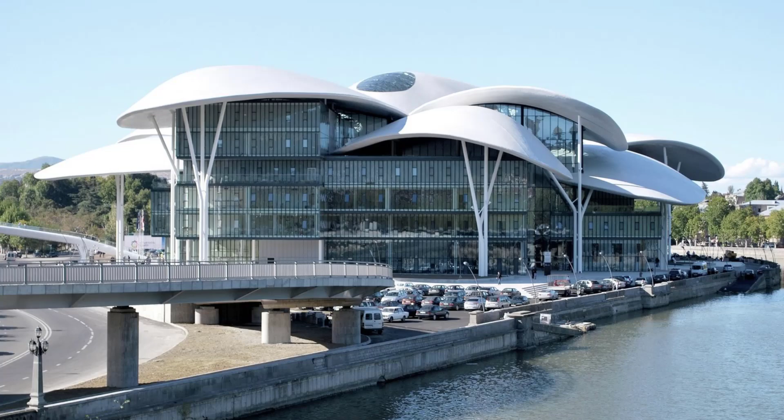Hey everyone, in this tutorial I will show you how to model this building, which is Tbilisi Public Service Hall by Studio Fuksas. So the trick in this building is actually all about the roof. The remaining of the building is just some rectangles and normal extrude. So anyway, let's start.

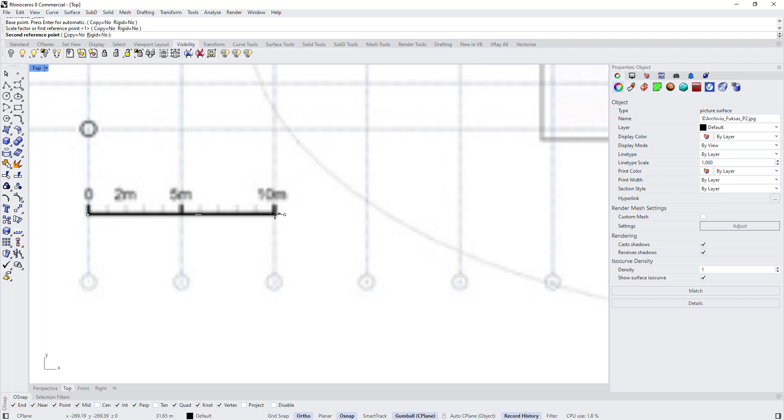So I already modeled these rectangles before recording to save some time, but I will show you how I did anyway. You can double click to minimize the perspective and double click to maximize the top view. You can drag and drop the floor plans, choose picture and scale it. You will find a scale bar here. So you choose scale 2D or 3D. I choose 3D. And this distance is 10 meters, so type 10.

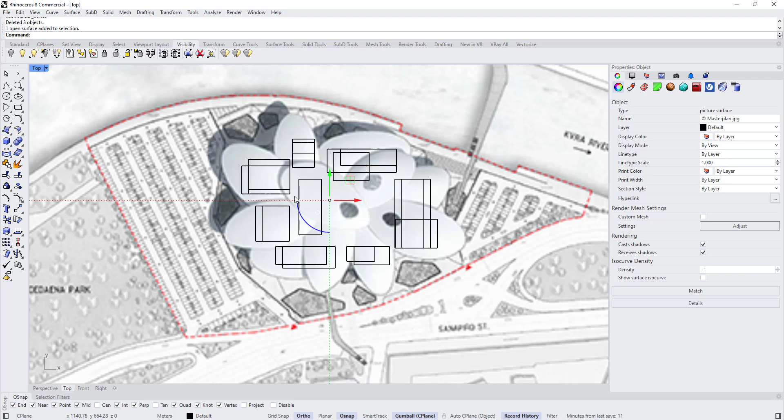And then start drawing the rectangles and then extruding. I did all of this before recording, because all the trick is about this roof. For the roof I also imported this image and scaled it, but I realized that this scale bar wasn't actually right, so I scaled it using this image as a reference. As you can see here, we have these exterior lines of the roof, so I use it as a reference to scale the layout.

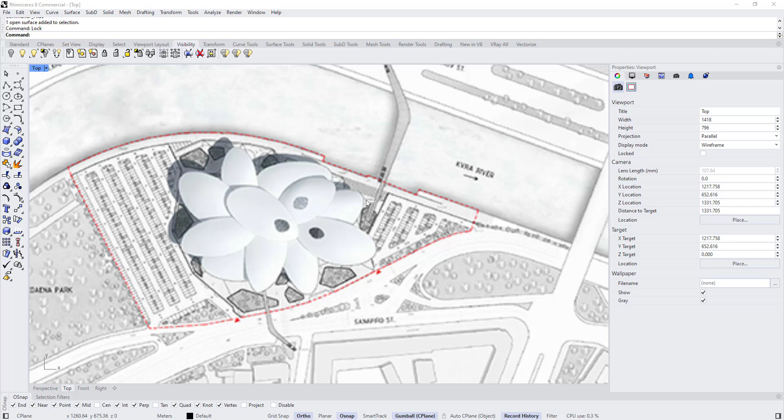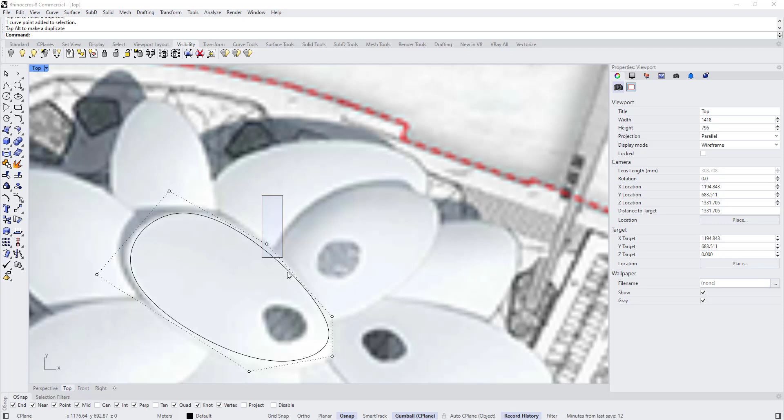Anyway, after importing the image as a reference, for now I will select all these rectangles and hide them, so press Ctrl H. Select the image and type lock, or you can lock it from here so we don't move it by mistake. And we'll start drawing curves, press F8 to close the ortho, by following these shapes, and start adjusting the control points using the gumball to match the reference.

I can copy this, select it and hold Alt and move it using the gumball. Then start adjusting the control points again. Let's disable the always record history for now. So right click here and uncheck always record history.

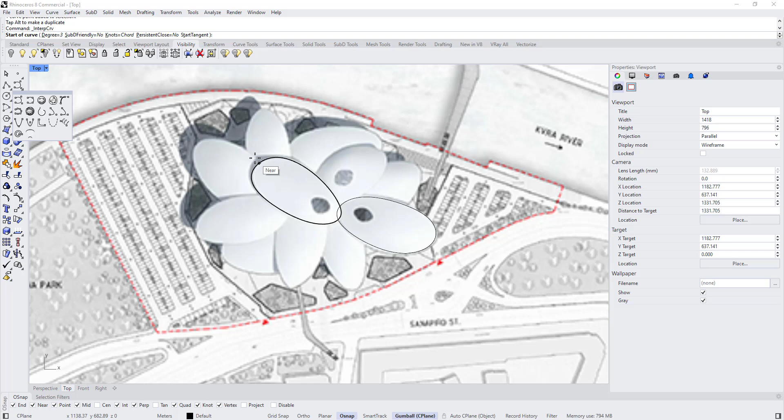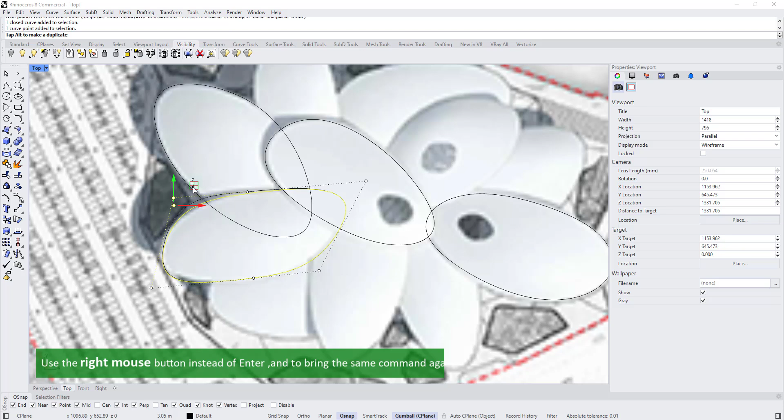We can choose this curve better. We can choose interpolate points curve so that the points will be on the shape, and then start adjusting it again. Right click to bring the command again and draw the remaining curves, and so on. I will speed this part a little bit to save some time.

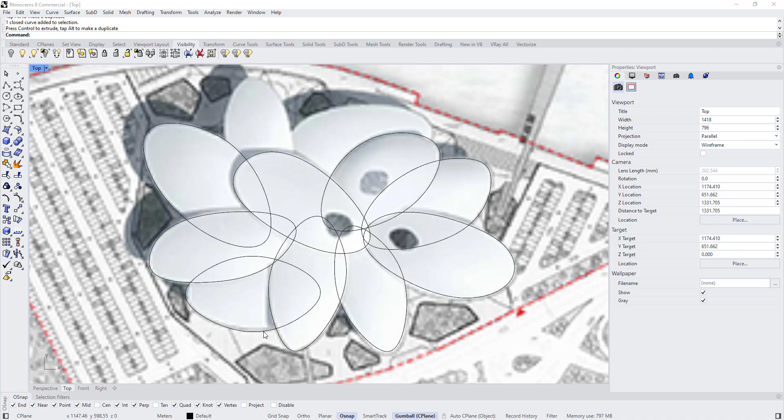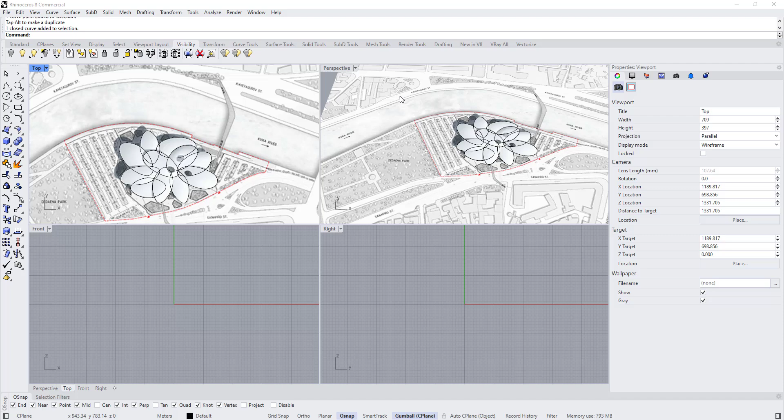Okay, now after drawing all the curves, I want to show you what we are going to do to create the surface. Double click to minimize the top view and double click to go to the perspective. What we want to do is to create a surface. So we can go here and create planar surface, and then we can rebuild this surface and move it up. Then press F10 and start moving the control points.

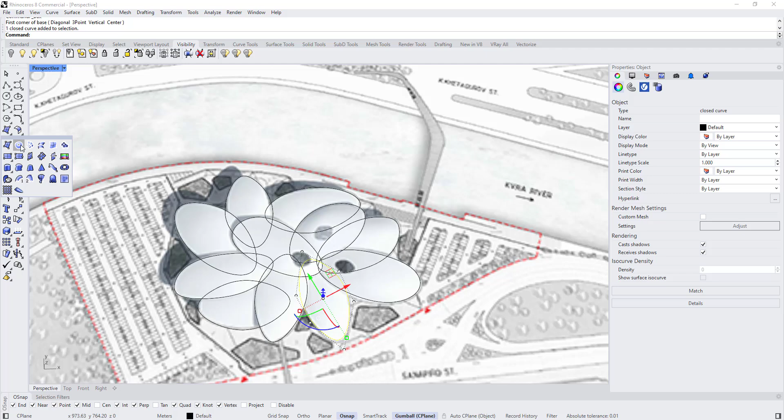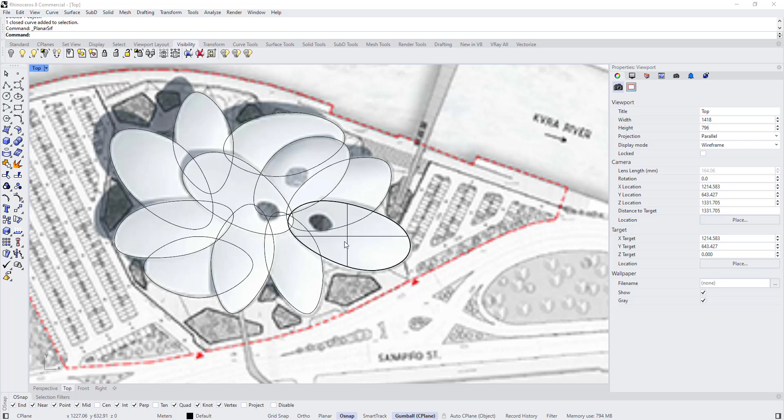For this shape, we didn't face a big problem, but for others we do. For something like this, if I created a surface from planar curves and press F10, as you can see, the control points are following the XY plane, not the shape itself. The points are not aligned with the shape.

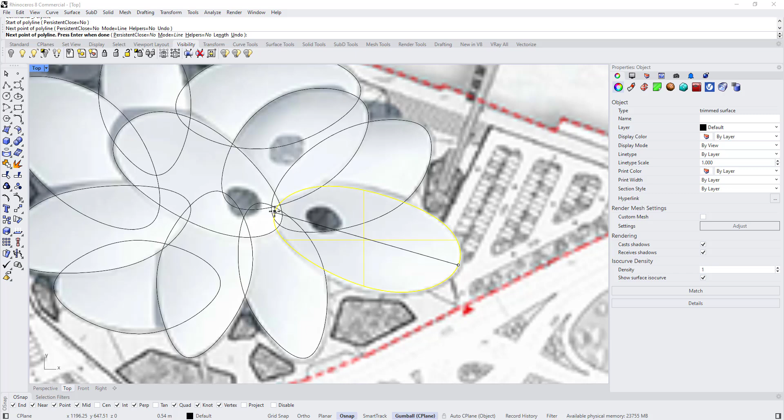What I want to do is to rebuild this surface or create another surface in which the UV directions are aligned with the shape, something like this, following this line, and something perpendicular on it like this. So the point is, don't use surface from planar curves.

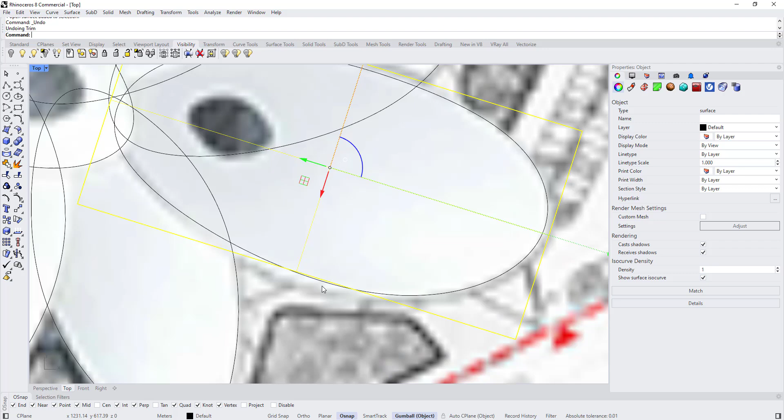What we are going to do is to create a 3-point surface, and draw the surface manually, trying to create the smallest bounding box for the shape. Choose the gumball, make it align to object, and start scaling it a little bit, moving it like this. And then trim it. I had to move it a little bit like this, and then trim the surface.

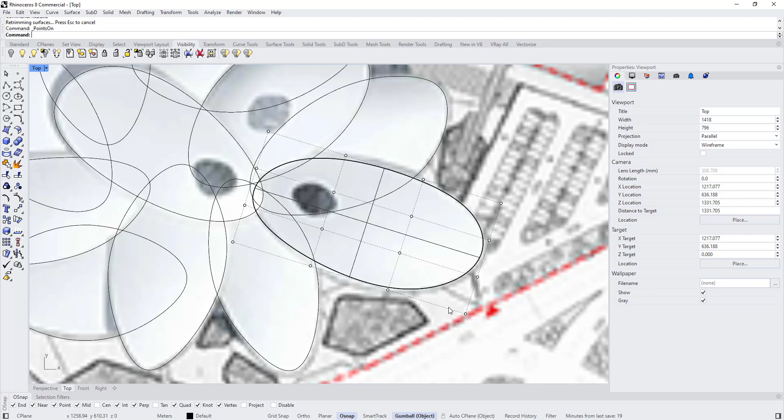This will give us a surface aligned in a better direction to be able to work with. So after we rebuild it, we will be able to edit it easier. As you can see, the exterior control points are closer to the curve. So I will keep creating the surface for the remaining objects. So choose 3-point surface.

Draw one here. Start aligning it. Double click, move this handle. Start scaling a little bit. Scale it from here too. Then hold Alt and copy it and rotate.

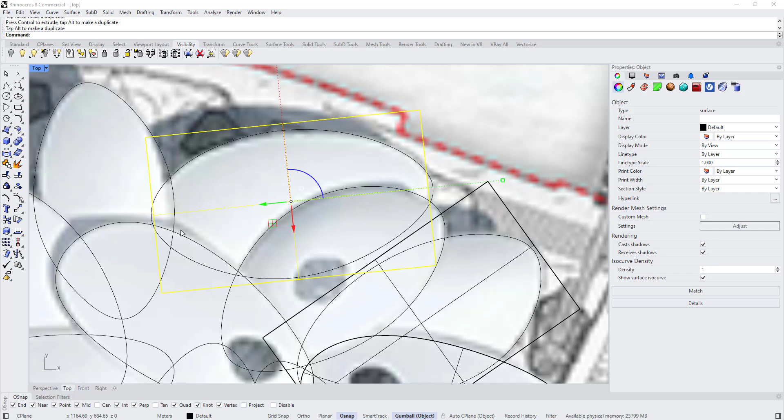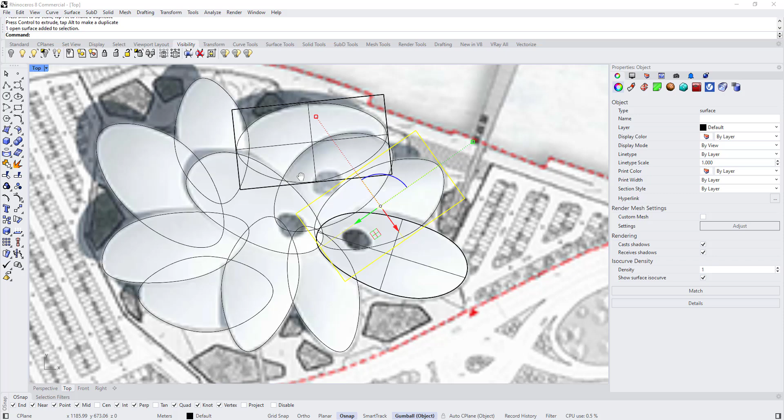So we'll keep creating the remaining rectangles for all the remaining shapes. Hold Alt and make sure that the gumball is set to align to object, to be always aligned with the rectangle. Double click and go to view, and let's align this one. I will speed this part up a little bit to save some time.

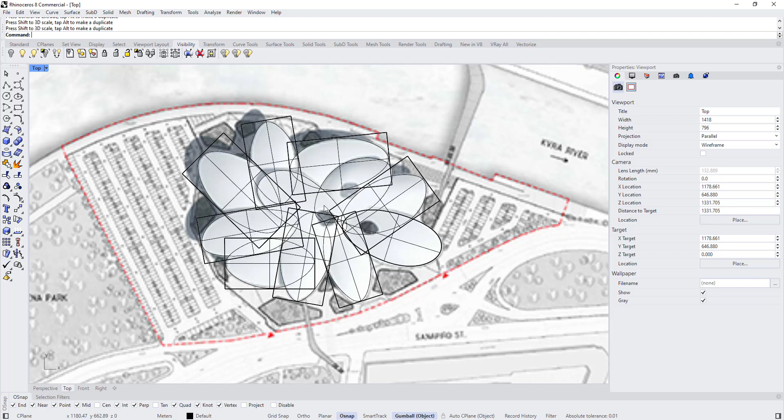Okay, after drawing all the surfaces, we are going now to trim them. So type trim, select the curve, right click, and select the object to cut. So right click to bring the command again, select the cutting object, right click, select the object to cut, and so on. Select the curve, right click, select the object to cut, right click to bring the command again, select the cutting object, and so on.

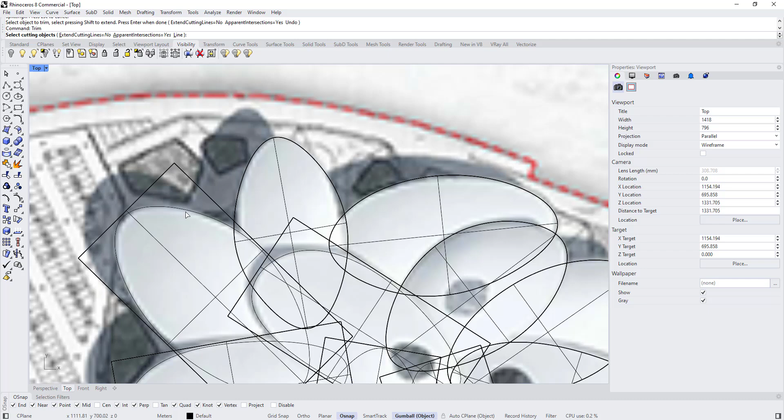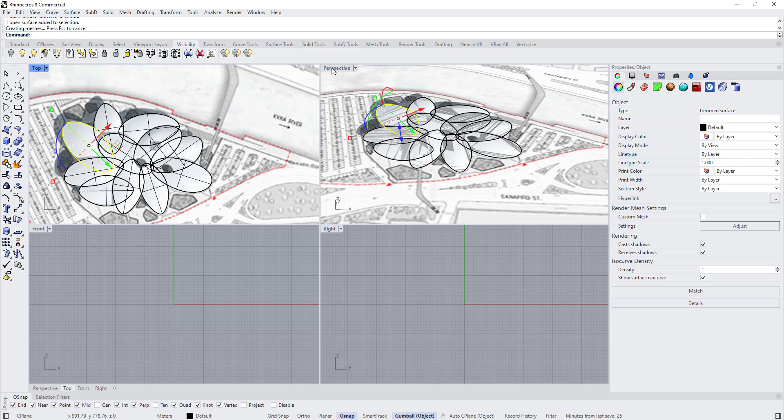So now we trimmed all of them, so double click to minimize the top view, double click to maximize the perspective, and select all of them. Move all of them maybe 50 meters. I will hide these curves for now, so select all of them and press Ctrl H. So I will use this as a reference to move objects in their right order. For example, this is in the top, then this under it, and this and so on.

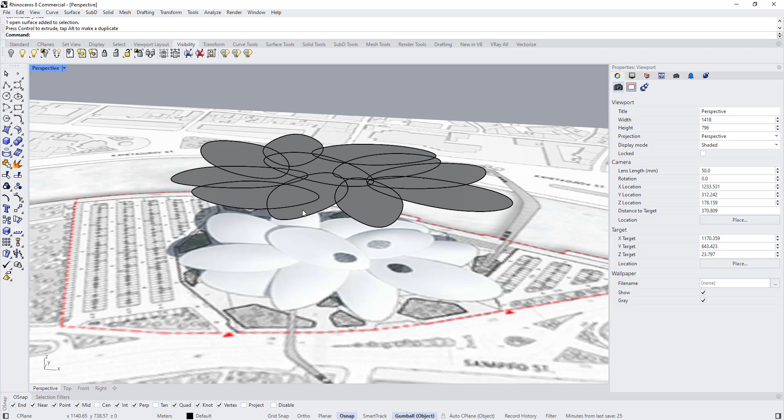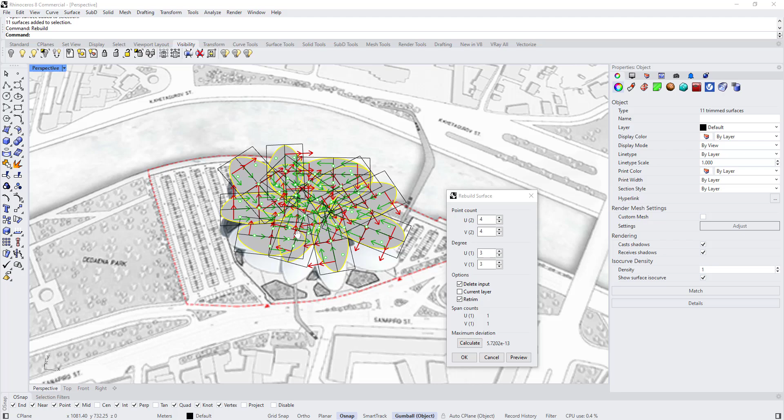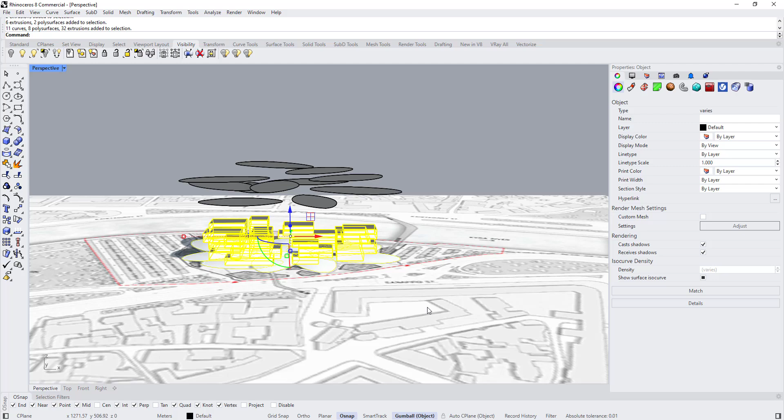So this needs to go up, and then this one needs to go up a little bit. Then this one, then this, and this one needs to move up, and this up also. This. Move up also. And I select all of them and rebuild all of them. Let's set the U division to 4 and the V to 4 and the degree to 3 in both directions. Press OK. Let's open the visibility to show these floors and select all of them, and let's lock them for now.

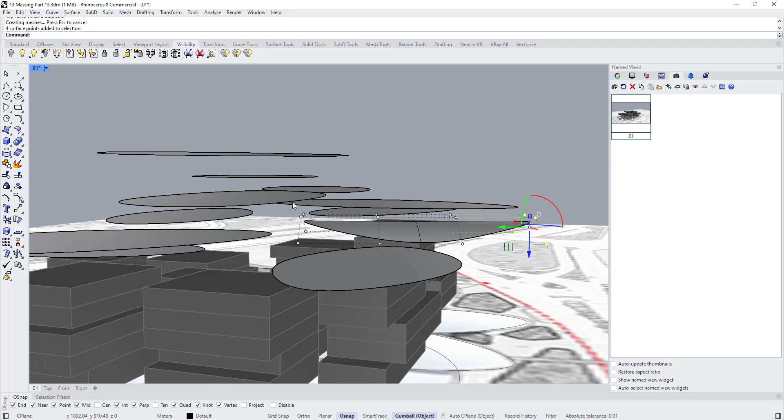Now we'll start using this image as a reference and start adjusting the design. Let's select all of this and move it down a little bit, maybe something like this. Okay, select the surface, press F10 and start moving the control points. So select all these control points, move them up a little bit, and then select this one and hold shift, select these parts too and move them down a little bit, maybe something like this, down more, and press escape and then move the whole surface down a little bit.

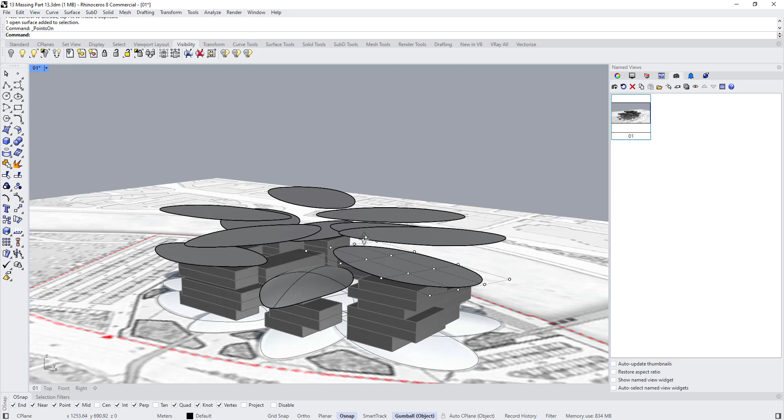And then for this one, same thing, come here, select all this surface, move them up, let's select all these curves, move them up a little bit, then select these points, and then move them down. And this one, let's click on the circle and align the Gumball to the CPlane. I think this needs to go down a little bit, maybe this part too.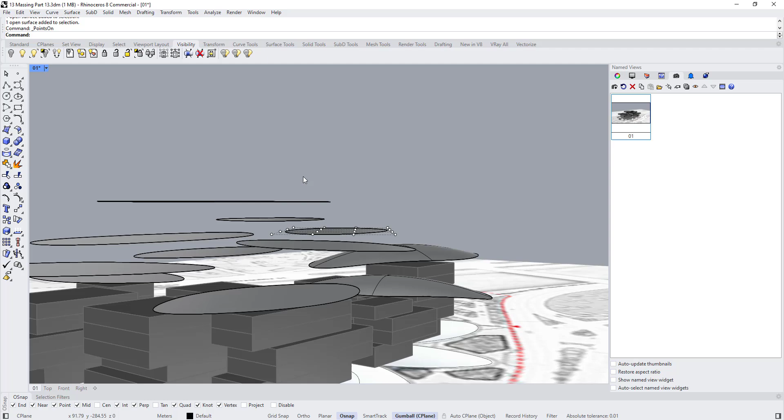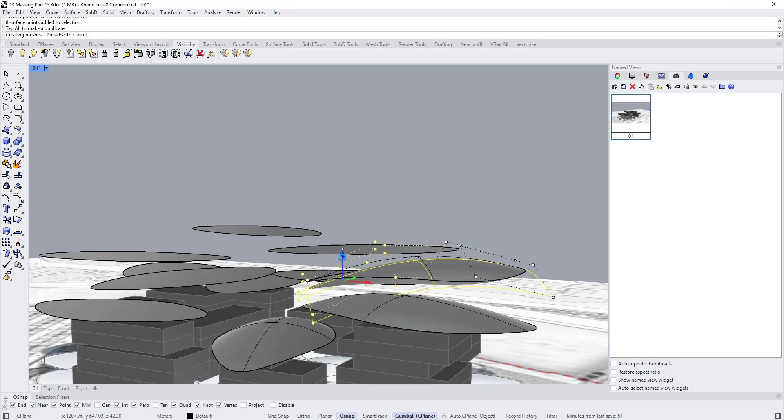Press escape, select this one, press F10, select these two rows of points, move them up. So let's go here, select this down a little bit, select this down also, maybe move it up a little bit. This one needs to go down, and so on. So we'll keep adjusting the control points until it matches the requirements. So I will speed this part up a little bit.

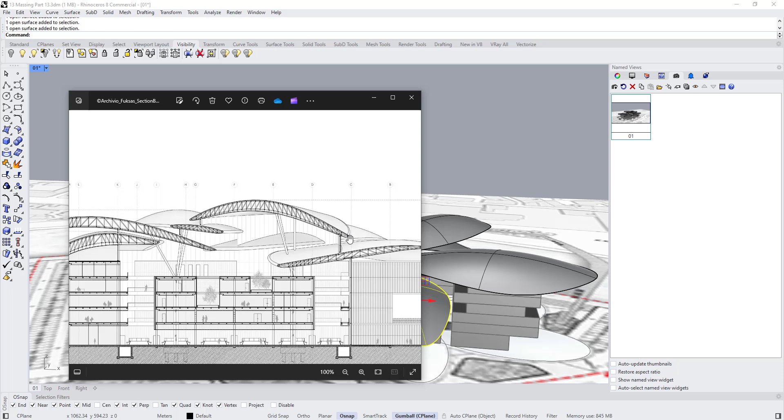Okay, now after adjusting all the control points for all the roofs, we want to add thickness to these surfaces. But first we need to understand how it's going to look. So for example here, if we look at the section, the thickness is not uniform, so we can't just use offset surface. So we will use offset surface, then we are going to adjust the control points of the surface underneath. Then we are going to use blend surface to create this soft connection.

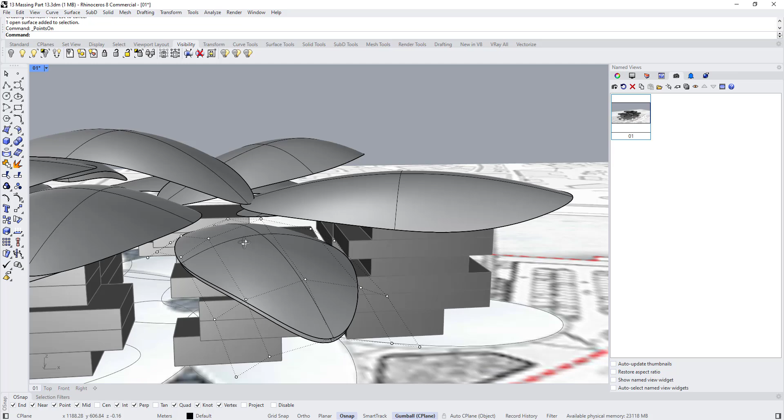So let's start with something like this. Let's type offset surface. Let's set the value to 1, for example, and press F10. Okay, Control Z. So I want to show you something. For this one, if I press F10, as you can see, the control points here are 1, 2, 3, 4. Here for this one, after creating the offset, the control points are 1, 2, 3, 4, 5.

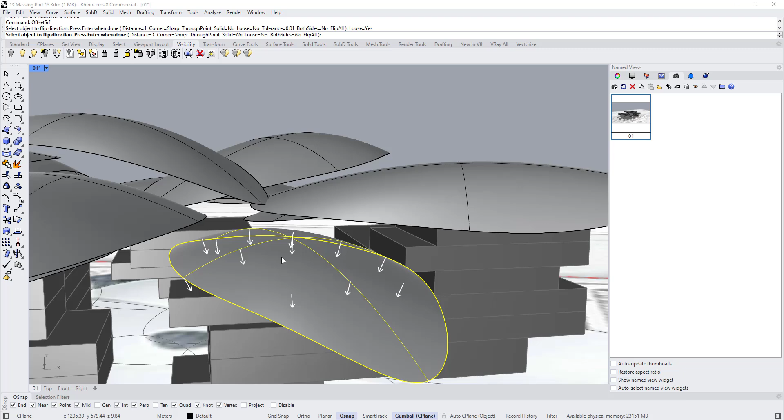The control points increased. If you want to create an offset with the same number of control points, I will delete this for now, we can use offset surface, but in the settings, set loose to yes. This will make the offset distance maybe not 100% accurate, but it will give us a surface with the same amount of control points as the original one. And by the end of the day, we are going to readjust the control points, so it's fine if the distance is not 100% accurate. So set loose to yes and create an offset.

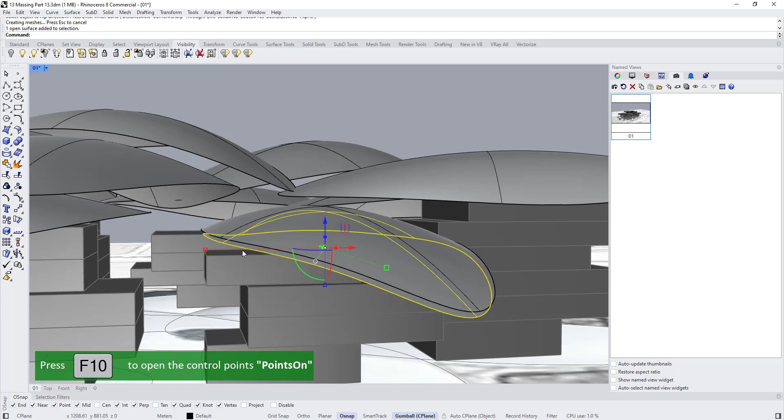Control Z. Okay, I will set the offset distance to 0.8 maybe. Press F10 to open the control points. Now, as you can see, we have the same control points. I'm going to set history to yes and type blend surface. So create a blend between this edge and this edge. And now I will select only these 4 points and move them down a little bit, maybe something like this, to have more thickness here.

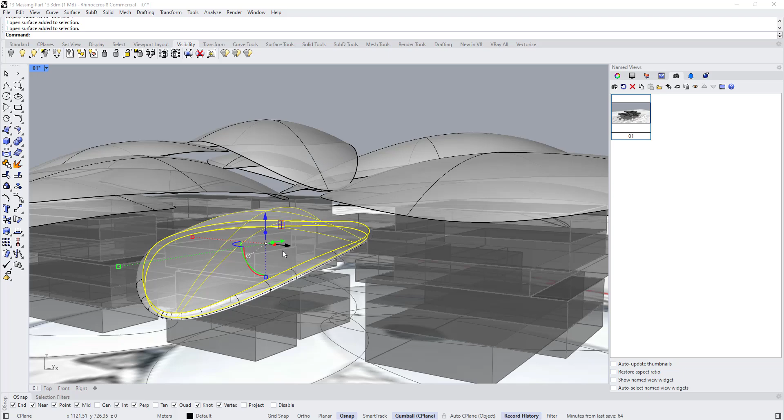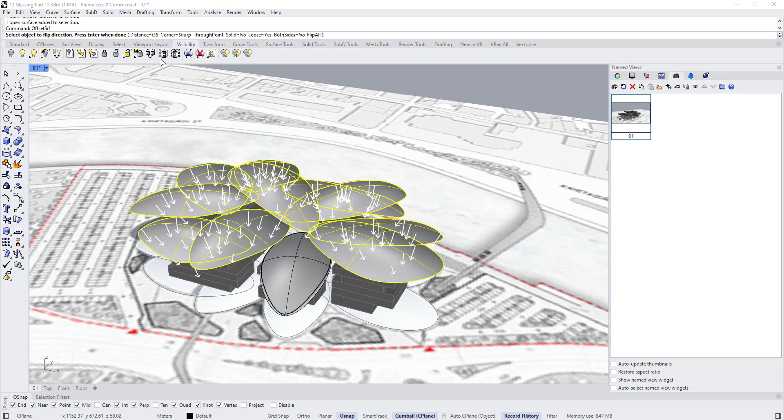So if I switch it to ghosted mode, maybe select this one and this one, as you can see, the distance between these curves increased, and this is something similar to this section. So I'm going to repeat this process for all the remaining surfaces. So I'm going to select all the surfaces at once, hold shift to select multiple objects at the same time, type offset surface and set loose to yes and the distance 0.8, and make sure all of them are in the same direction. So press right click.

So now let's blend surface, select this edge, and then right click, this edge, right click, and just set it to curvature or maybe tangency. Okay, no, set it to curvature. Curvature is fine. Right click, and again right click here. I am using the right mouse button to bring the command again, and instead of enter to finish the command. This is for a faster workflow.

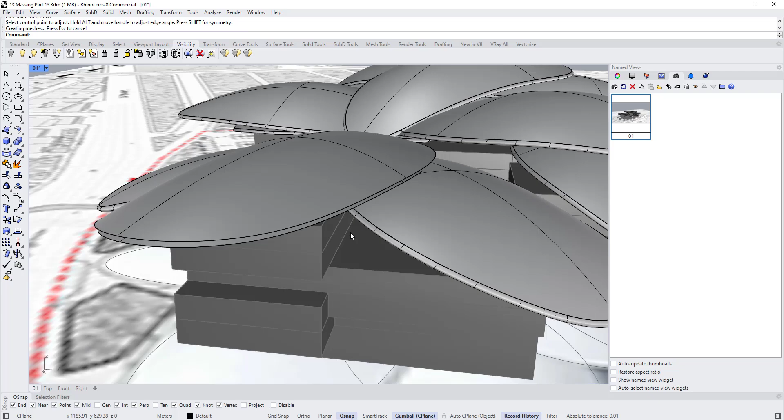Maybe this one needs to go up a little bit, so I'm going to move only this one. Since we were recording history, when I move this up, all the other elements also moved up. This one needs to go up a little bit too.

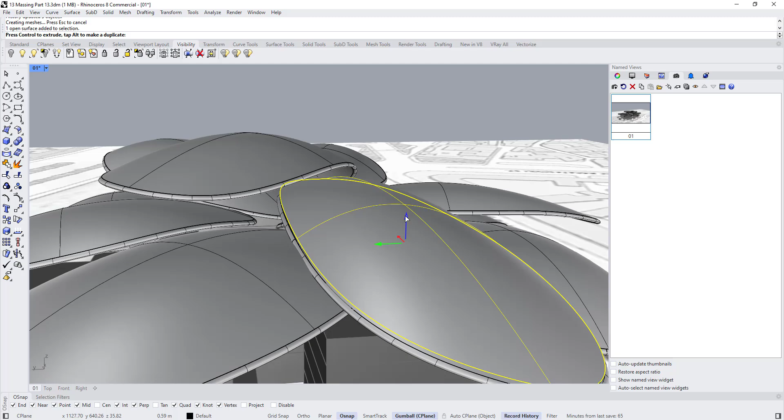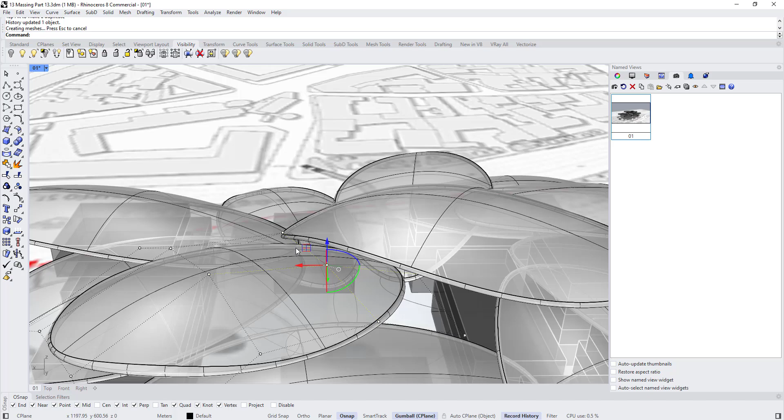Select this one, press F10. Okay, Control Z. Select the one in, make sure to select the one in the base.

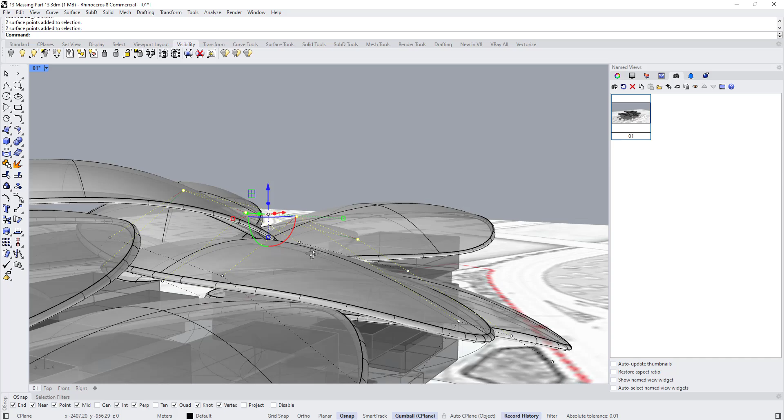Okay, that's it, we are almost done. Only remains creating the columns. So let's go to the... Okay, for the columns, I will need to... let's unlock this for now. Let's select this image and press Ctrl H to hide it.

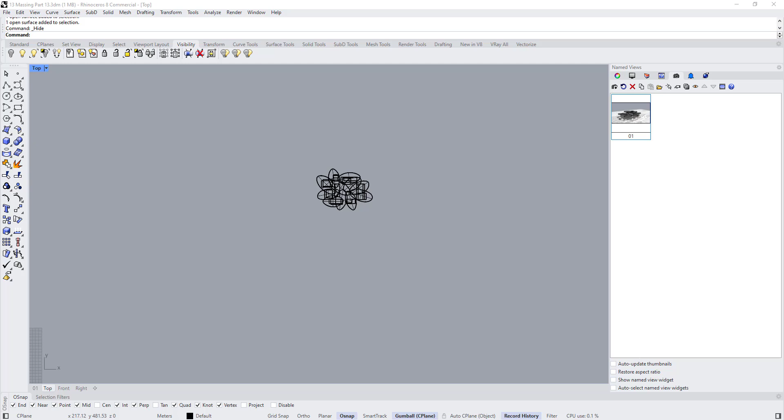I will need to use one of the floor plans to create the column, so I am going to import this one picture and scale it. Let's use this scale tool - choose scale 3D, select this point, press F8, open also a second point and type 10 meters. Let's place it in position.

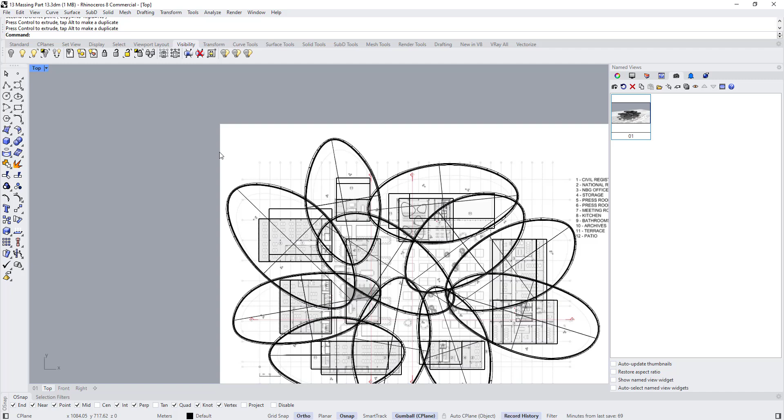And let's lock it. As you can see, these 3 points are for these 3 circles are for columns. So I type point and press a point here, right click to bring the command again, press a point here, and right click to bring the command again and press a point here. Now to create a curve from a point, we can extrude it.

So I'm going to use a gumball and extrude it like this. So we have these 3 curves. And as you can see, the columns are not completely straight, they are inclined a little bit here.

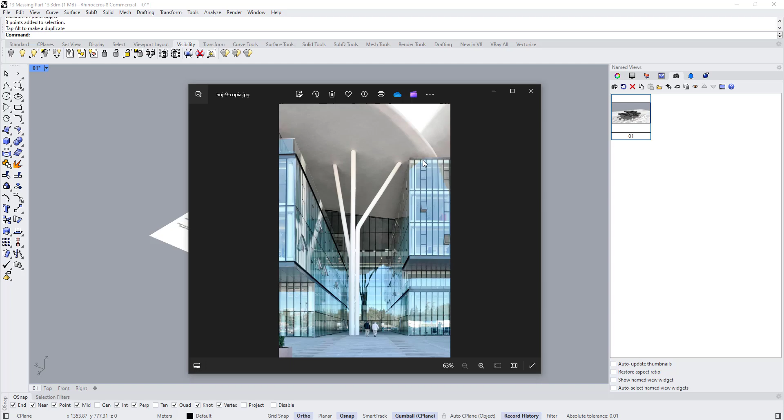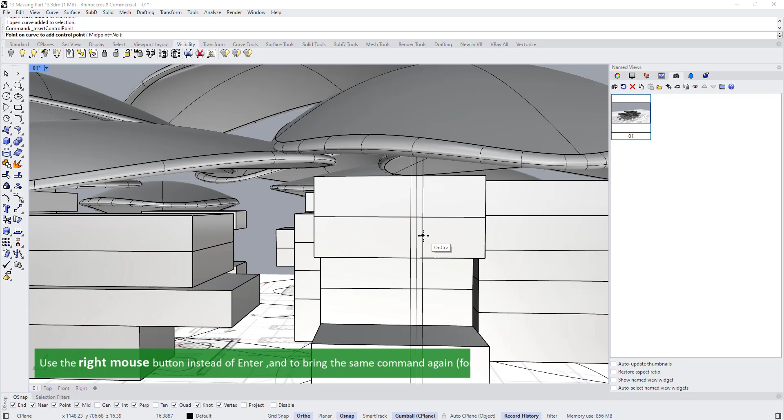So select all these curves and let's isolate it. Select it, press F10. So this one needs to go maybe something like this, and this one too needs to go something like this, and move everything up until it intersects the surface.

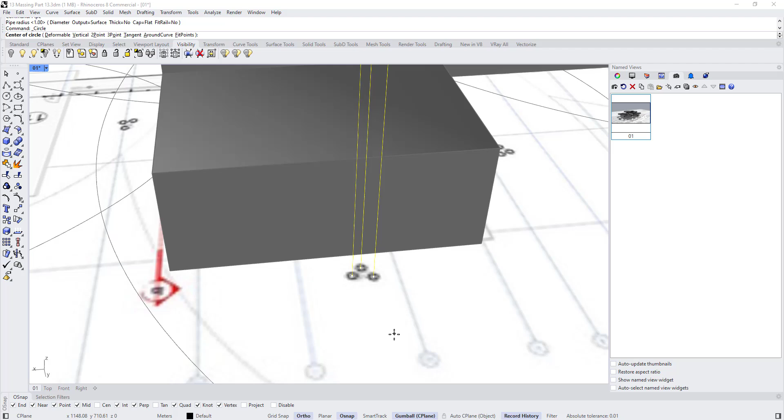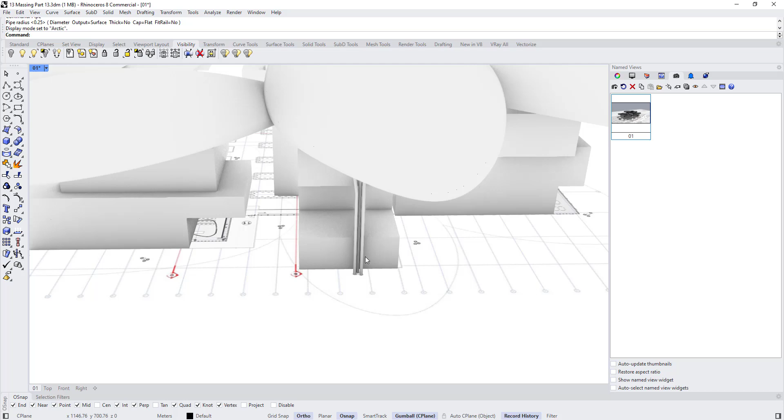And by the end of the day, we are going to use pipe. I just need to see this - the radius is about 0.25, so select these curves and type pipe, radius 0.3, press enter. Okay, now radius 0.25. And I will use the same process to create the remaining columns.

Okay, let's go to the top view. We double click to minimize the view and double click to maximize the top view. Type 'points' instead of 'point' to be able to create more than one point using the same command. So press point here, let's close the ortho. One here, and here, here.

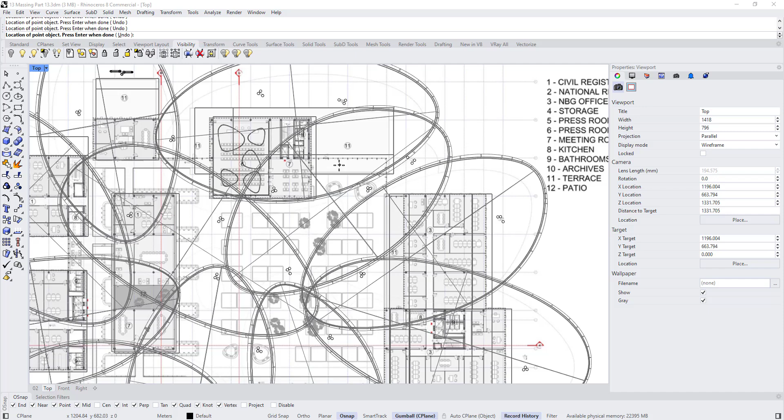Okay, after finishing placing all the points, press right click, double click to minimize the view, double click to maximize, type SEL curve, or you can use it from here. Select... SEL points, select point, or you can use it from here.

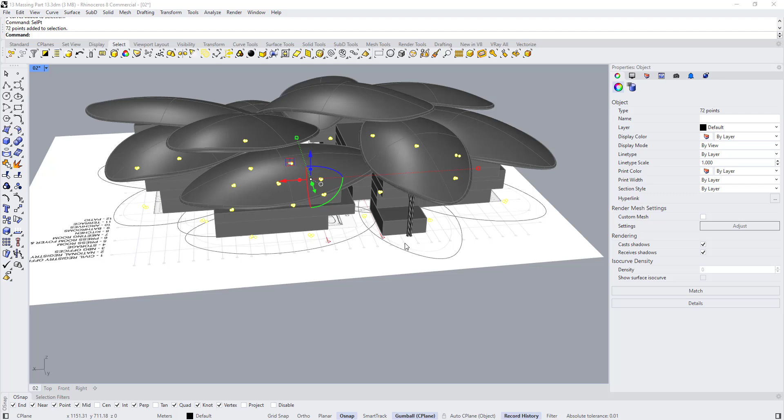And now let's extrude all these points, and let's start adjusting them and adding, for example, this point. Select this, press F10, and maybe I can select all of them and type pipe.

We are already recording history, so after creating the pipes, if we did any adjustment to the curves, it's going to be reflected in the pipe. So set the radius 0.25, right click, okay.

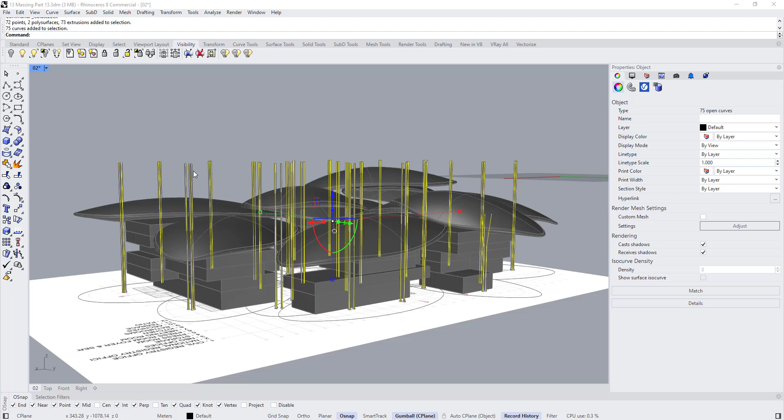So now type SEL curve, select the curves only, and go to the visibility and isolate. So now all we can select is a curve. Select this, for example, and press F10. We can move it as we want, and as you can see, the pipes are updated.

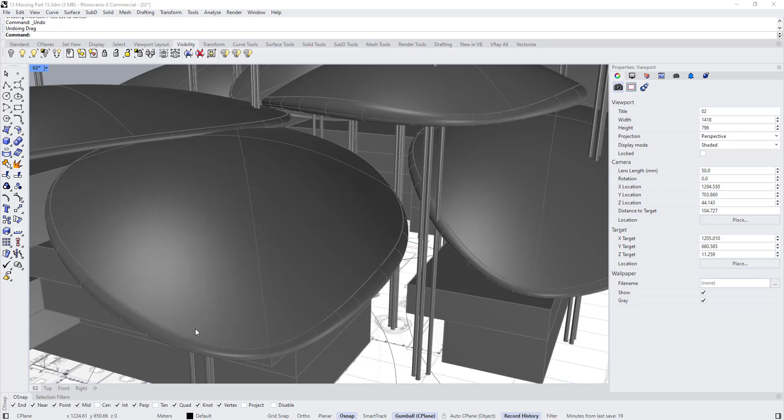I can come here and start adding control points, maybe one control point here, right click, select this curve, select this point, move it like this maybe. Same thing for this one - add the control points here, select this point, move it like this.

I might speed this part up because it is just the same process for all the remaining objects.

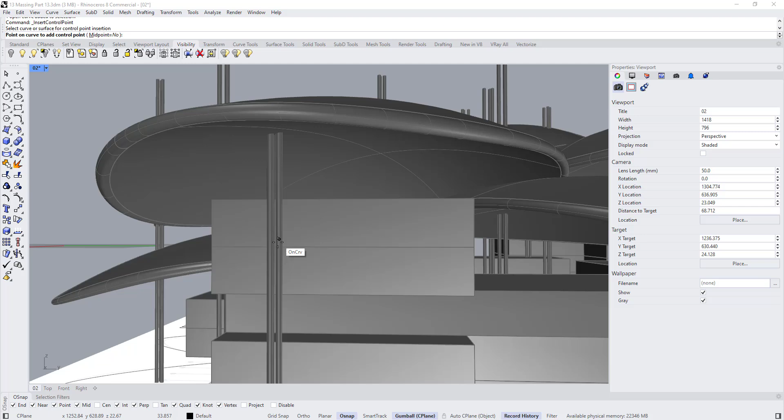By the way, we can select all of them and rebuild, but maybe keeping this as they are, select this one. And let's rebuild them - set the degree to 1 and the control point to 3 to add another point in the middle.

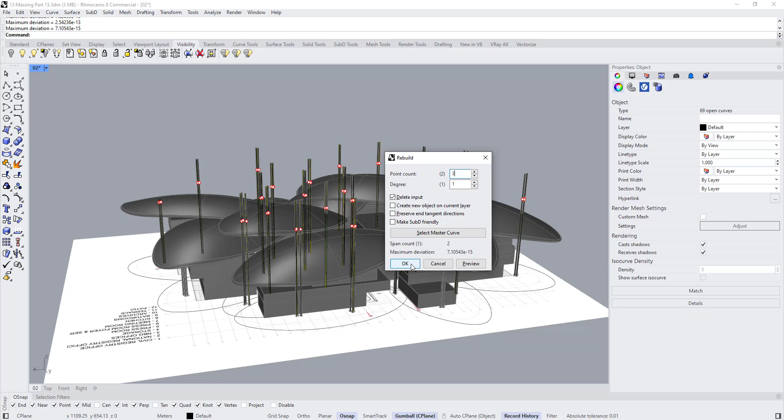Okay, so now if I select this, for example, and press F10, we already have - let's go to the wireframe - we already have a point here. So I can go a little bit with this down, then select this point, move this here, move this here, moving this up, and so on. Make sure that this point intersects with the roof.